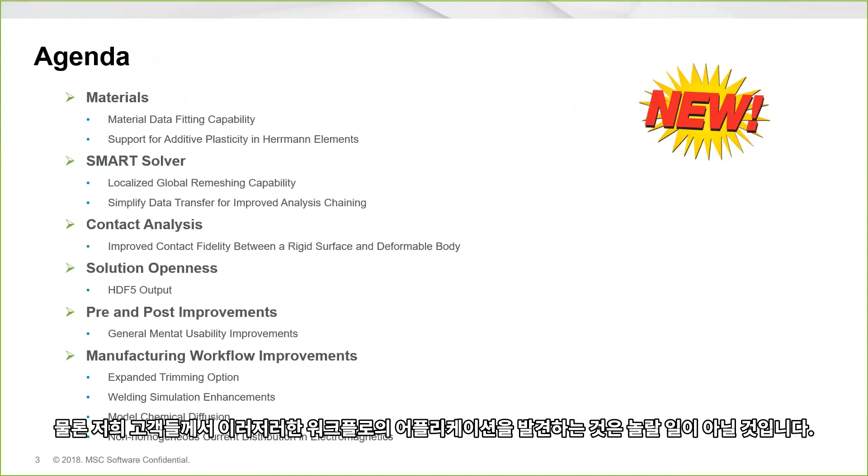So I'll go ahead and start with materials. Sorry if I rushed it a little bit. I just want to make sure we don't run out of time.

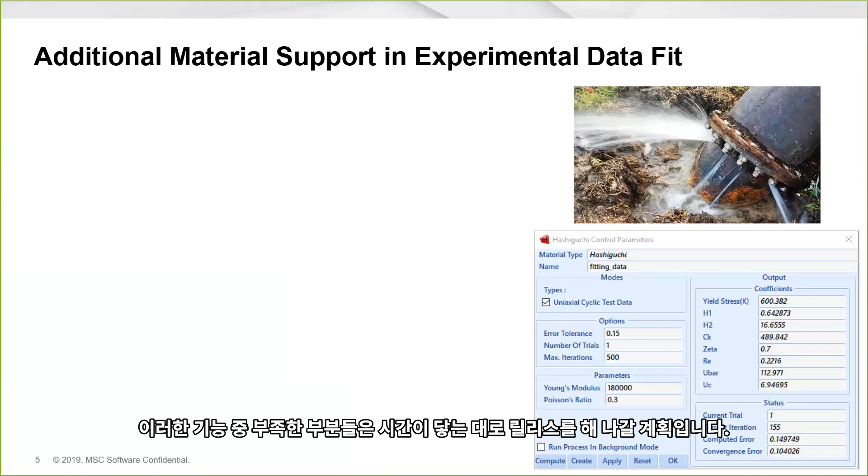We've been working on experimental data fit in multiple releases. I think this is a trend you'll see more and more, where if we aren't able to get all the functionality in one release, we continue to release as time goes on. If you're not familiar with experimental data fit, please, if you're using our more complicated models, it's definitely worth your time to take a look at it in Mentat.

So right now what we've done is we've included cyclic plasticity models now in the experimental data fit. The idea is that will make it easier to use and reduce any potential for user error on the input side.

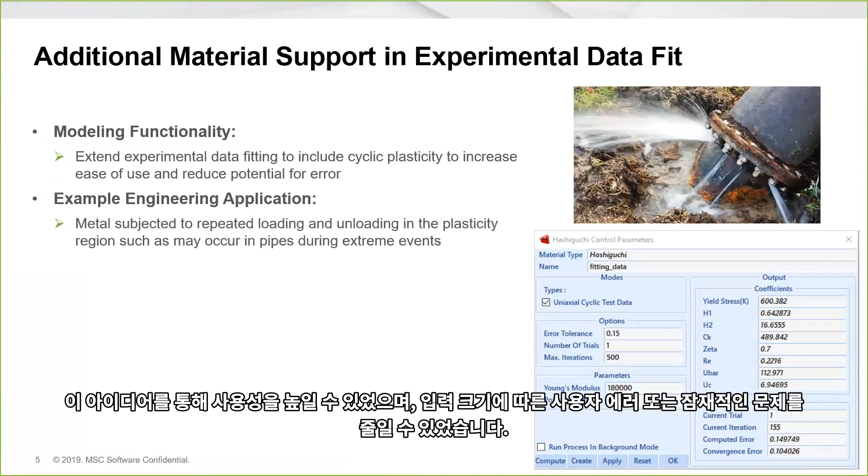Cyclic plasticity, I probably don't need to explain to most people why it's important, but we do see it a fair amount. The implementation is very straightforward. You just select the plasticity in the experimental data fit window, and now you'll have an option for cyclic plasticity. And now we support both the Chaboche and the Hashiguchi model.

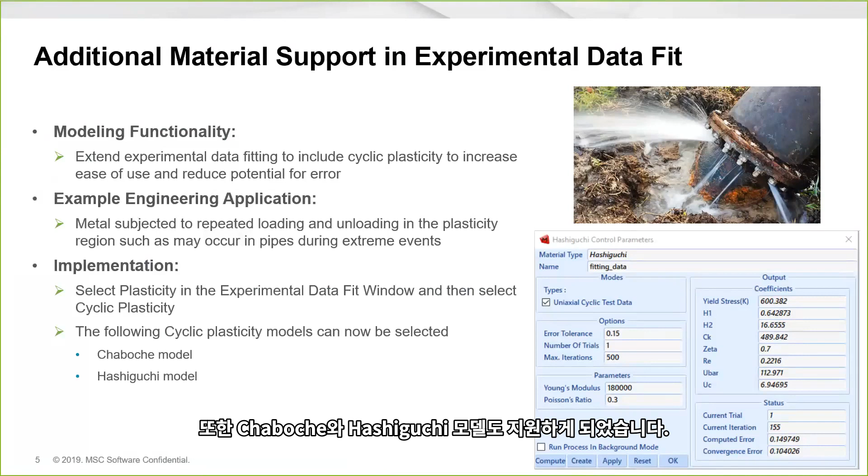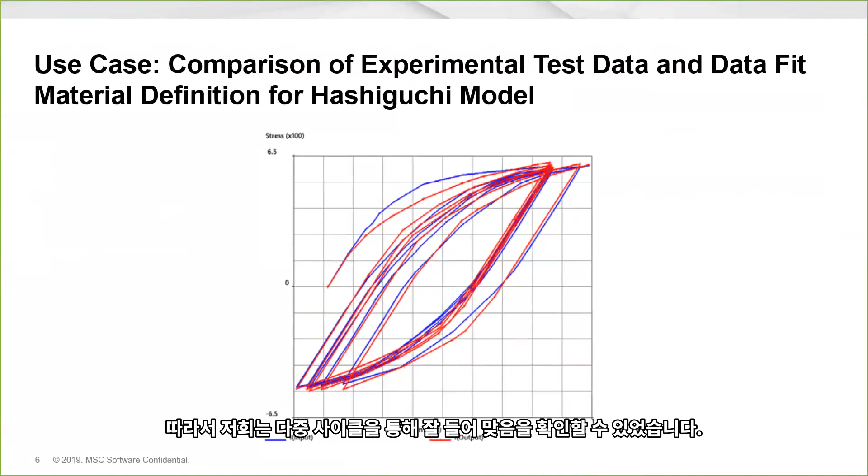The other thing we did related to materials actually bleeds a little bit into elements was really our support for additive plasticity in the Herrmann elements. If you're not familiar with them, generally for incompressible materials, they really deal with some of the shortcomings of other elements. And now we've added this additive plasticity formulation that we believe will improve the accuracy and or runtime as well over the elements you've used today.

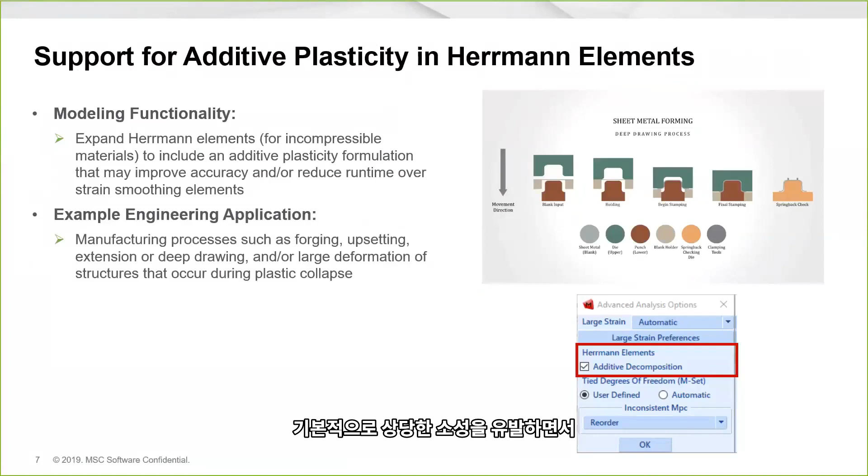So if you're doing manufacturing processes such as forging, upsetting, extension, deep drawing, anything basically where you have a large amount of plasticity, especially when it's constrained for that incompressible aspect.

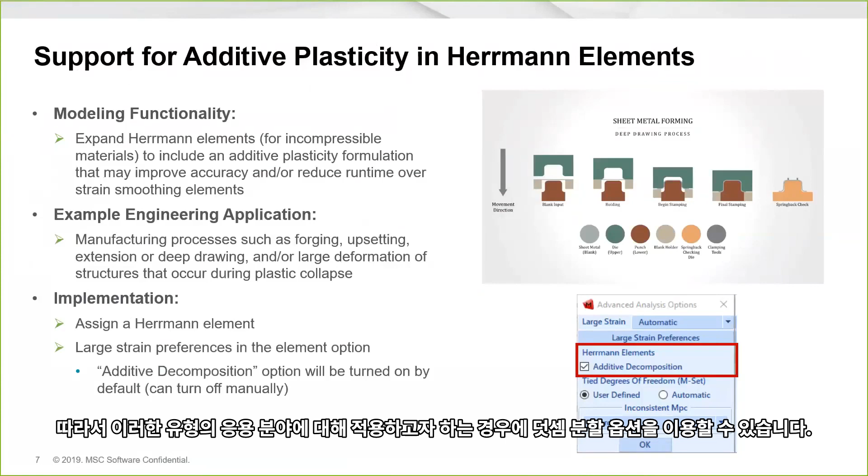So the implementation: we assign a Herrmann element, and now with that, the large strain preference in the element option, if you go to that, you'll see that it is turned on by default. So you can turn it off, but it's now on by default. This additive decomposition is really our way forward when we're talking about this type of application.

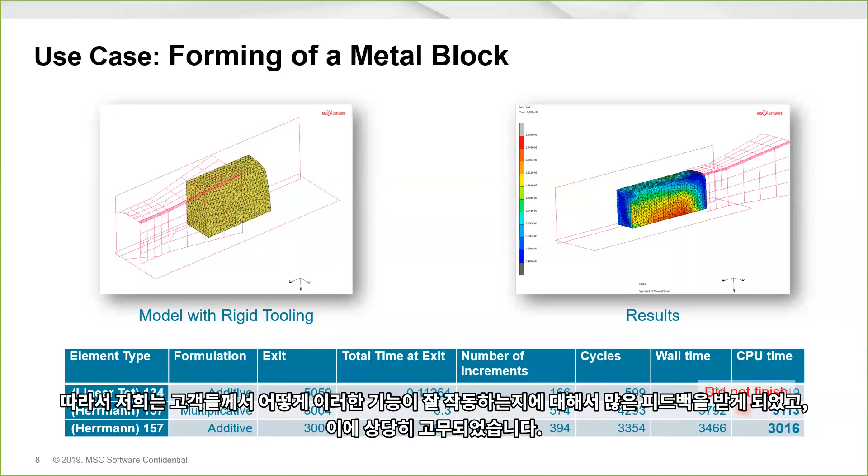Then the Smart Solver. So one example that we have in this release is this localized global remeshing capability. Right now, when you use global remeshing in previous releases, you had to remesh the entire contact body. What we've now extended as global remeshing, even though it seems a little funny because it's not necessarily global in the word of global, is that we can now run that remeshing just locally.

One area that is obviously advantageous is around crack propagation, when you really only need to remesh the area around the crack tip, but the rest of the body is not being subjected to anything significant.

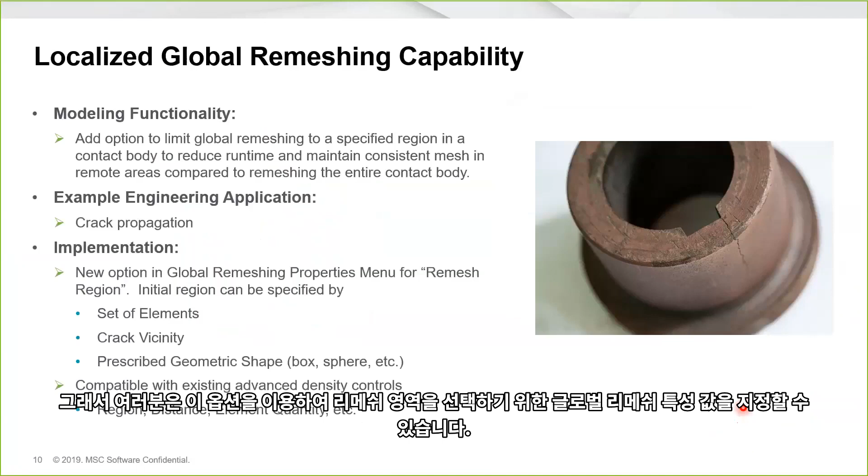So the implementation in the global remeshing property menu for the remesh region, you now have this option where you can specify this region. It can be a set of elements, as I mentioned previously, it can be about a distance around a crack tip, and then it can be a prescribed geometric shape, a box, a sphere, et cetera. And it's compatible with all the existing advanced density controls.

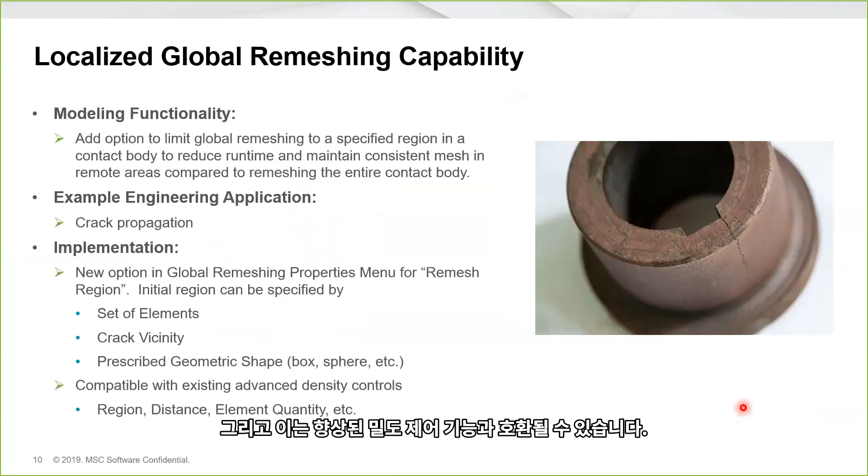The advantage of this really depends on the size of your region, the size of your overall contact body compared to what you ran before, but we do think you can get some significant runtime advantage. You can see that in the reduction in the memory and the total time it took to run this model. But it's going to vary by problem.

So again, we'd love to hear your feedback on exactly what you're seeing in your improvement using this localized global remeshing. The other advantage of this capability is that if you want to track points away from your region of interest, because it's not being remeshed, you have consistency from increment to increment on the results location and where you're pulling data from.

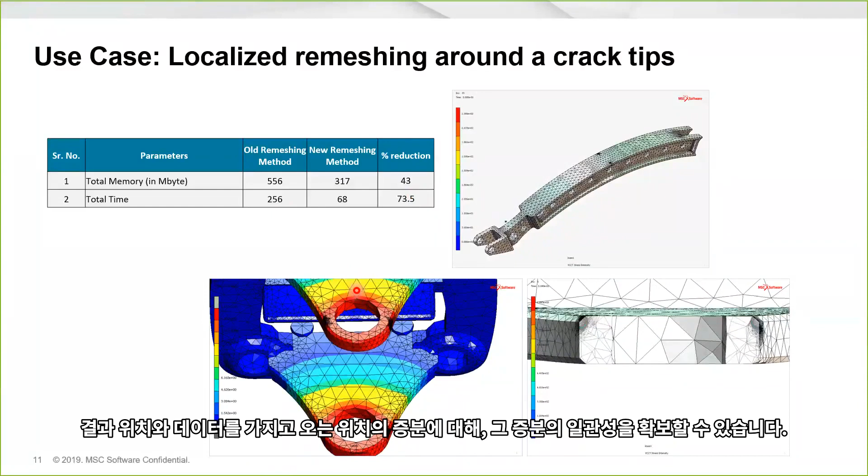The other enhancement that we're calling SMART is the simplifying data transfer for analysis chaining. Really what this is about is model section. Not everyone knew about model section before. If you're not familiar with it, I encourage you to take a look at it.

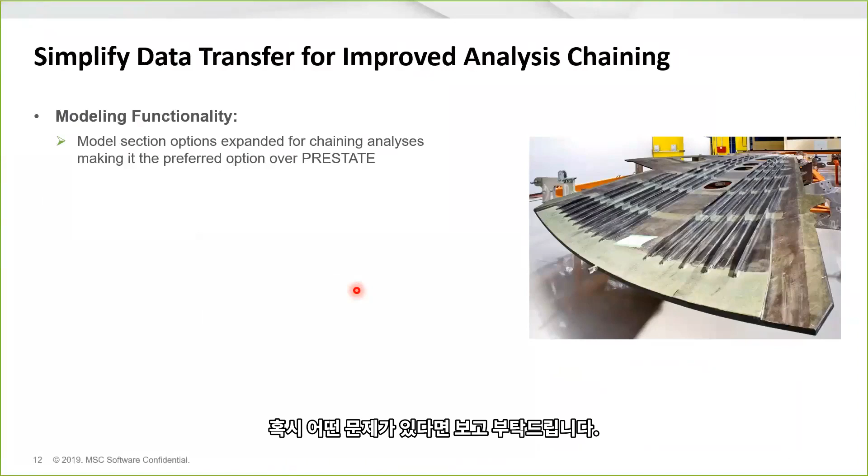We've expanded it for chaining analyses so that it's easier to do that. We think this is the preferred option over pre-state now. So if you are using pre-state, we encourage you to take a look at model section. If you see any issues, always report them to us, because this model section is definitely our path forward.

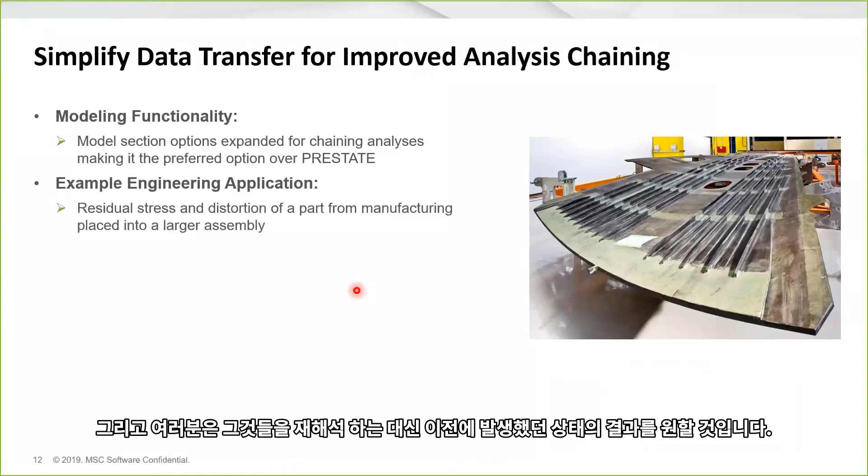So example application: maybe you have residual stress and distortion of a part from manufacturing, and then you want to place it into a larger assembly, or you're sending it to someone else to do other analyses on it, and you want that state that happened before. Instead of them rerunning it, they can use the model section to pull the actual state over into the new analyses. So the model section is defined as before, and you can do multiples.

We've added the option for the frequency of writing to include the end of the load case. It's also possible to take a lower order, a 2D or axisymmetric model, and expand it into 3D. That's already been there. What we do now is support a bias mesh when you do that expansion.

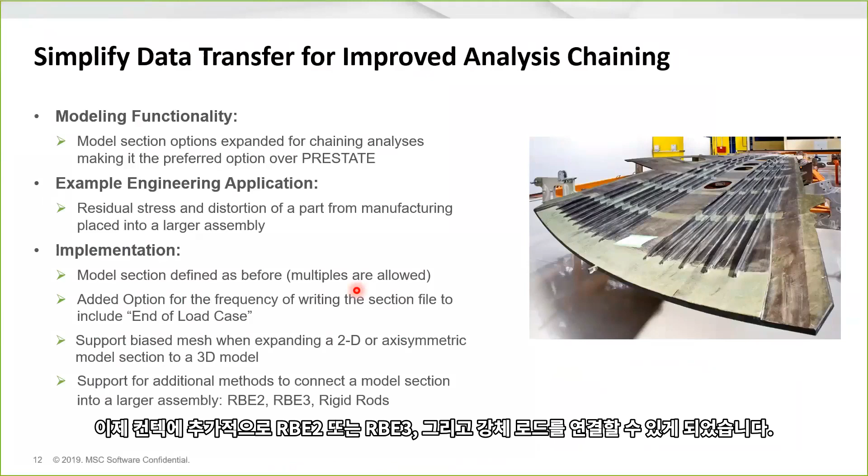And then we also support additional methods to connect the model section into the larger assembly. So now you can connect the RBE2, RBE3, and rigid rods in addition to contact, which we've had. So you can see here's an example.

So obviously chaining analysis is very important, something we think there's value in. I'll challenge us even further to start thinking about this as really a way of modularizing the analysis, because if you look here, each of these are a different model section. They could have been subjected to a different analysis.

They could have been prior to this, so maybe some kind of assembly, manufacturing, state, whatever it may be. And then you can take this and connect it together and build using RBE2s, RBE3s, rods, contacts, et cetera, and build an overall model.

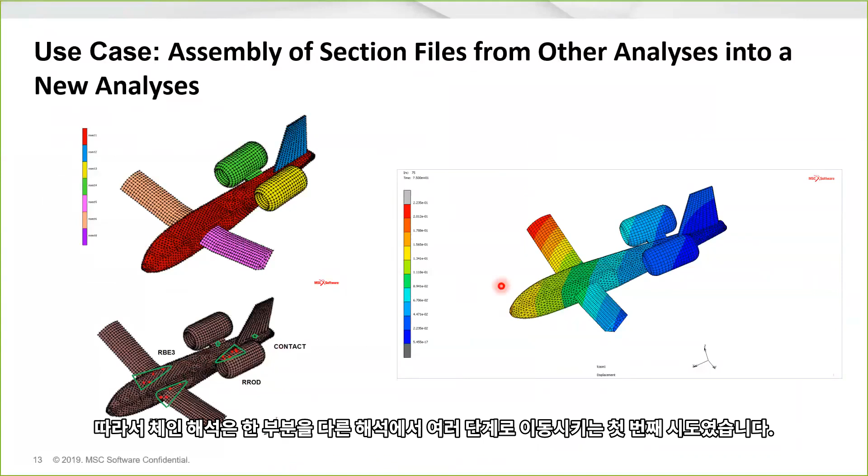So obviously analysis chaining was our initial drive to do this, of moving one part through multiple steps in different analyses. But we should also keep our eye open and look at this way of actually combining different models into a larger assembly and being able to run that larger assembly with loads as well.

I think I'm going to switch now to Bhumi, and she's going to talk a little bit about contacts.

Okay, thank you, Matt. So in contact analysis, we did enhancements to improve the contact fidelity between rigid surface and deformable body. So let's go through it. If you recall, in version 2018, we did a lot of enhancements on contact surfaces. Now with version 2019, we have done some significant enhancements in segment-to-segment contact, including rigid STL surfaces and deformable bodies. With this enhancement, our main goal is to limit the penetration to improve fidelity of the contact, which would result in improved accuracy of the contact.

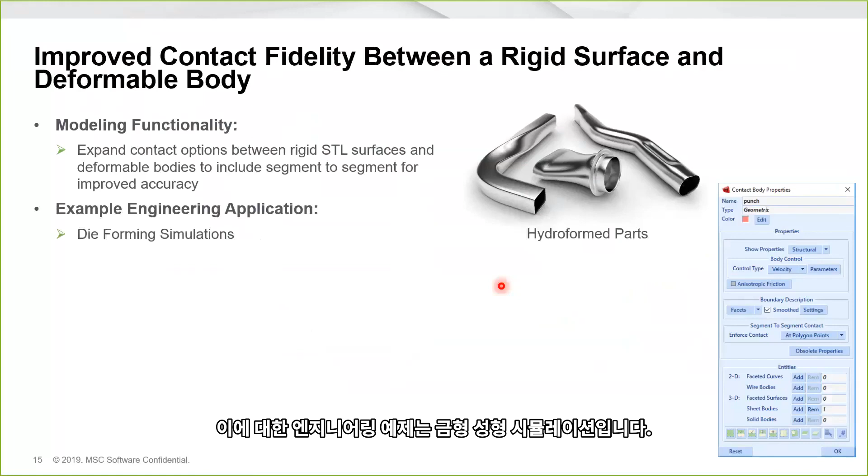An engineering example of this would be a die forming simulation. When implemented with this scenario, the STL surface can be used as is, or you can use the faceted surface option if you still choose to use that one. Additional contact points are defined by the solver on the rigid body to limit penetration. This means that there is no user input required in this case. It does it automatically.

The other area where this is useful is augmentation and associated parameters, previously limited to deformable to deformable contact, and now these are supported in geometric to deformable contact. And lastly, this new functionality supports delayed slide off between deformable and faceted surfaces.

In cases where you have a small gap in your contact surface and you don't want your contact surface to fall into that gap, which would then cause numerical difficulties and not being able to resolve itself, we now have a delayed slide off option to make it easier to go across the small gap.

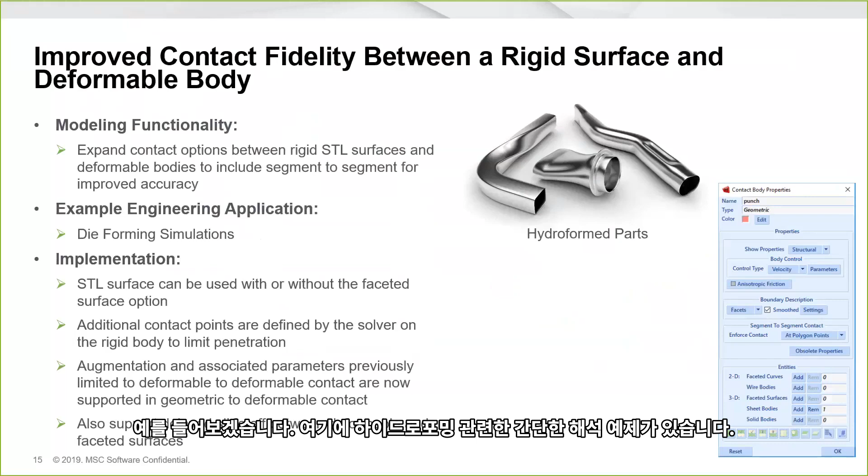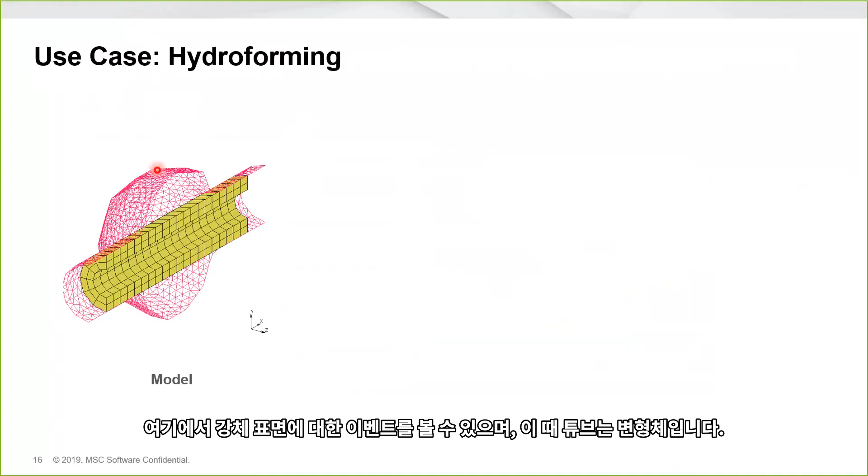So let's go through an example of this. Here is a simple case example where we have hydroforming. You can see here the red surface is the rigid body and the tube is the deformable body. And if you see the results, and if I expand them more into close-up results, you can see that we really did get a lot of fidelity there in that contact, and we did not have any penetration here.

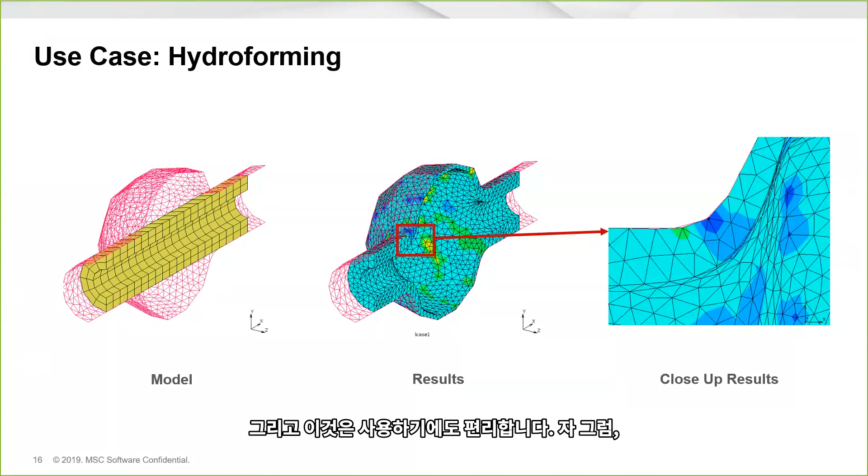This is to show that we are continuously working on contact analysis to fine-tune it and make it easy to use. And I'll also say, as I talked before about how we continue to work on our enhancements even afterwards, this is a follow-up from the previous release where we did this with rigid to rigid. So this is encouragement to the customers out there that if you see that we've done something in enhancements, we are listening in terms of making sure that we complete our enhancements and take them all the way through.

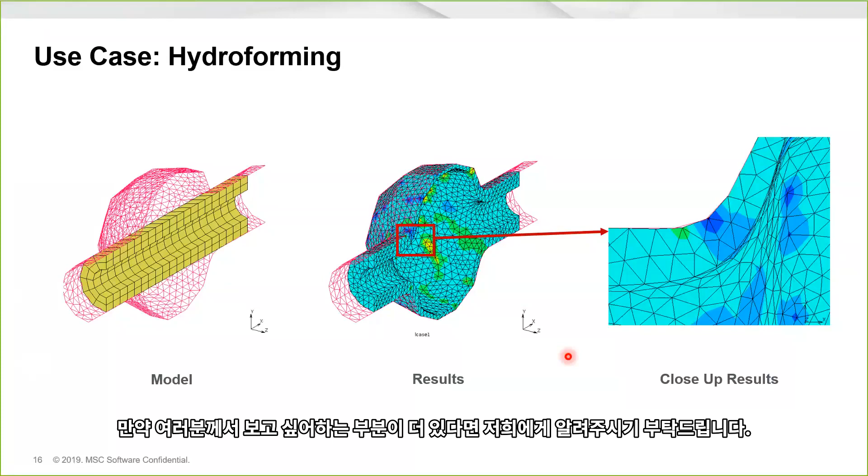Thank you. And next we will talk about solver openness.

As co-simulation is becoming more important, we realize that it is very important for us to have solver openness. So we're adding some very important enhancements to the Marc 2019 release, which is we added HDF5 output. So what is HDF5? HDF5 is basically an open source output format, which can be generated as an output result file with Marc. It could be outputted in addition to your T16 file, and the file size is really small, so it wouldn't hurt your file size at the end of the analysis.

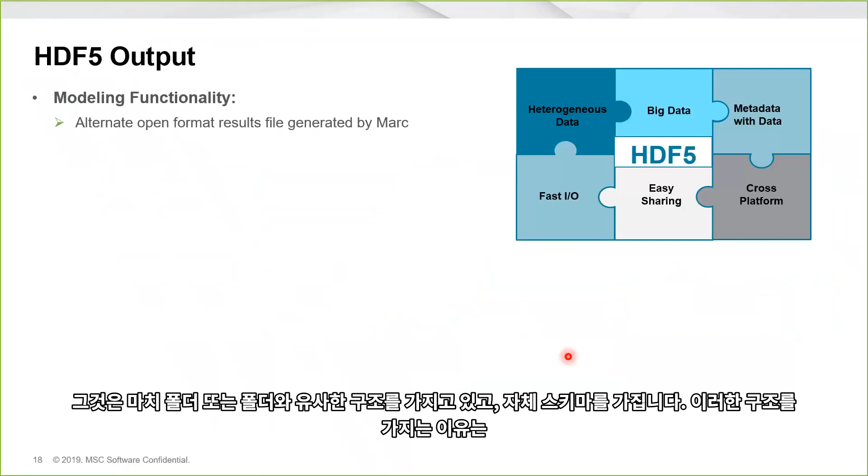HDF5 is basically an alternate open format generated by Marc 2019. It is structured, more folder-like in structure, and it has its own schema. So why did we do this? We did this in order to improve the integration into downstream engineering processes by accessing output data directly without a post-processor. As you can see over here, it looks just like an Excel sheet, and you can look at your results over there as well, along with your T16 file.

A good implementation of this would be if you use our other solver, MSC Nastran, then you can also use the HDF5 file generated from Marc. They're compatible with each other, MSC Nastran HDF5 and Marc HDF5. So if you have linear analysis with MSC Nastran and you want to move to Marc, you can do so easily, and it would be the same schema.

HDF5 is available to MSC Patran as well, so you can post-process that in MSC Patran. The outputs supported in this release are the displacements, external forces and reaction forces, and stresses and strain.

And the elements supported in this version are the basic TET elements. The linear and quadratic 2D plane stress, plane strain, axisymmetric, and the linear and quadratic 3D continuum elements are all supported.

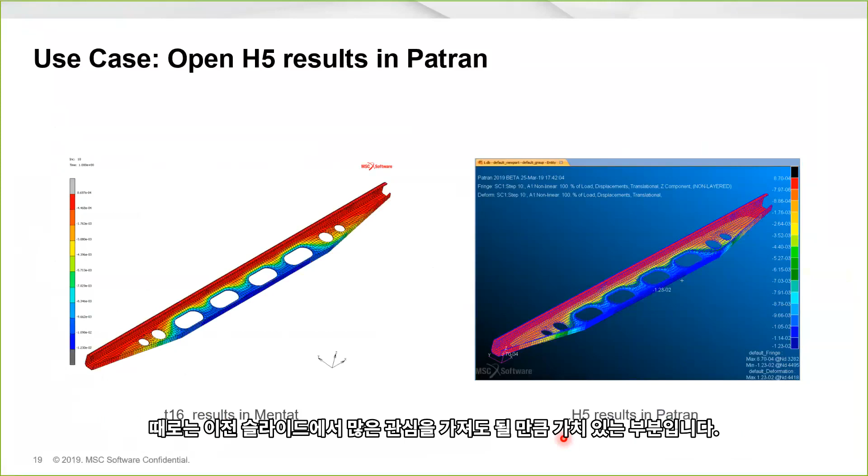Maybe if you know from the 2018 presentation, I tend to have some of my favorite enhancements, and this is one of my favorites, in terms of enhancements that can be overlooked sometimes but are really worth a lot of attention. If you go back to the previous slide, I think the important thing to remember about this output is that it is open.

In the bottom right, that's the HDF view, which is a freely available application. And you can actually look into the results and different aspects of the model that previously would have been very difficult to do, might even have required you opening it up in Mentat or Patran or a third-party post-processor.

So really, this is about making sure that you have access to the data you want and you can use that data how you want. We should also note that there are Python extensions, Java extensions, I think there's even C++ or C extensions for HDF5. There are a lot of ways of working with this HDF5 file involving scripting as well, to extract the data you want.

So in cases where maybe you already know what data you want, you can automate this and it can be extremely fast. As I said before, you may not even need to open up a post-processor. So it's a very powerful tool, a capability that, of course, is limited in this first release, but like the other things I've mentioned, we're going to continue to add to this release over release, supporting more elements, supporting more outputs. So definitely something to be interested in.

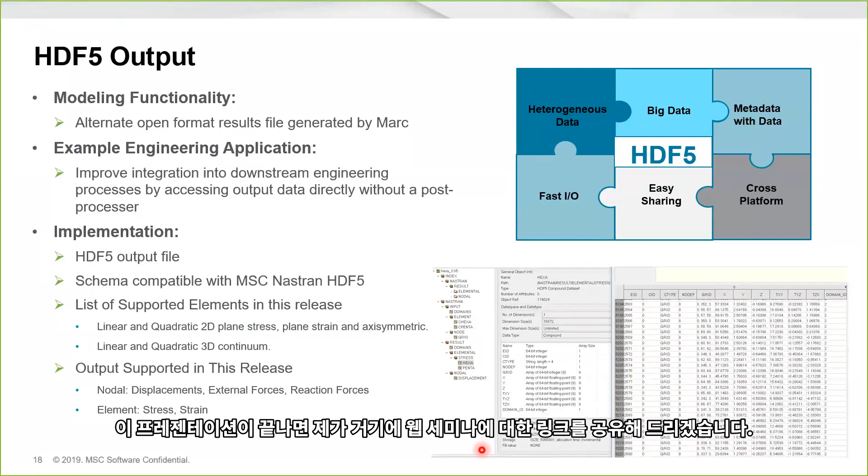And one other note: do not worry about our support for T16, we'll continue to support it. This is really about an additional format that we think adds a lot of flexibility and capability that we couldn't do with T16. Another example of that is that with HDF5, there's nothing stopping you from writing your own data to it as well, and we're considering that as we look forward on where we're going with this openness capability. We have a webinar on this on our YouTube channel, and I will share the link after this presentation.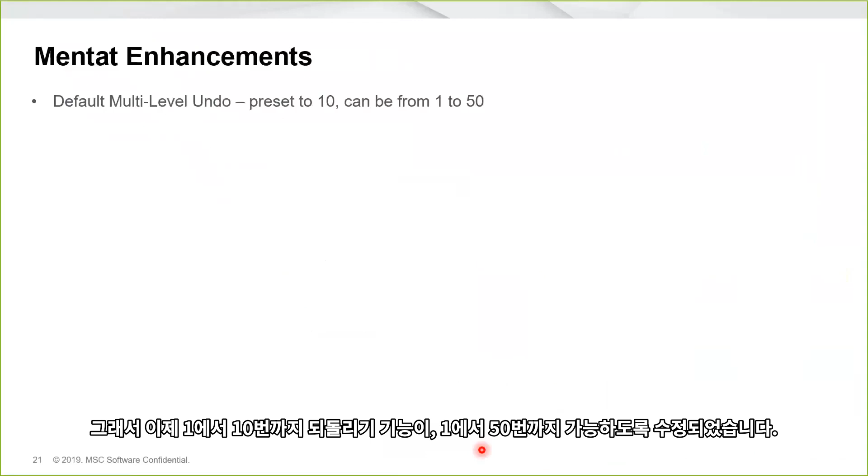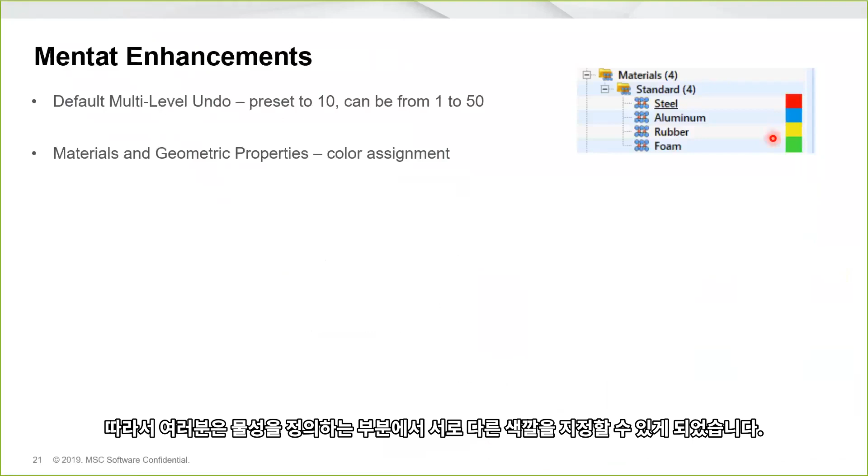Next we will talk about the pre and post improvements with Mentat. First, we changed the default multi-level undo to 10, and it can be changed from 1 to 50. Next, if you remember, we have color assignment for different contact bodies, so we extended it now to material and geometric properties, so you can define different colors for different material properties or materials. Next is the default maximum and minimum values for contour plots.

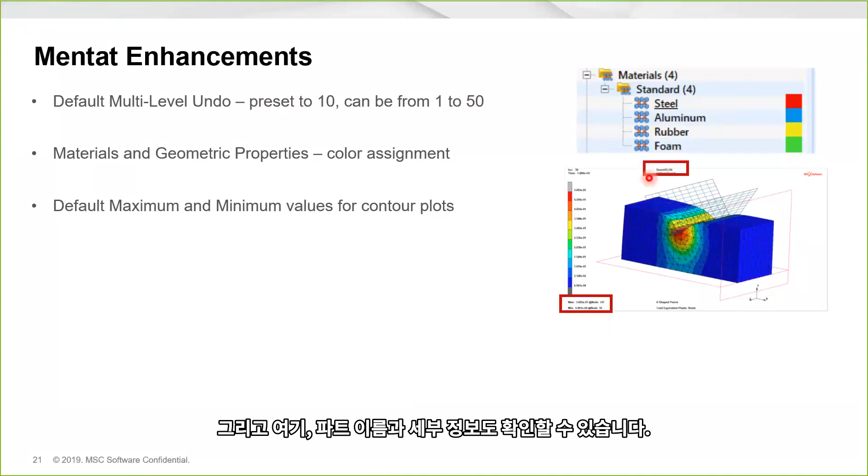As you can see in this image, we have the default maximum value and then the node number next to it, and minimum value as well, with the node or element number next to it. We also have the plot name and those sorts of details. We also added right mouse button options for show all, hide all, or show only, for curves, surfaces, elements, model sections, solids, contact bodies, and sets. Last but not least, we added an option to reduce the data points.

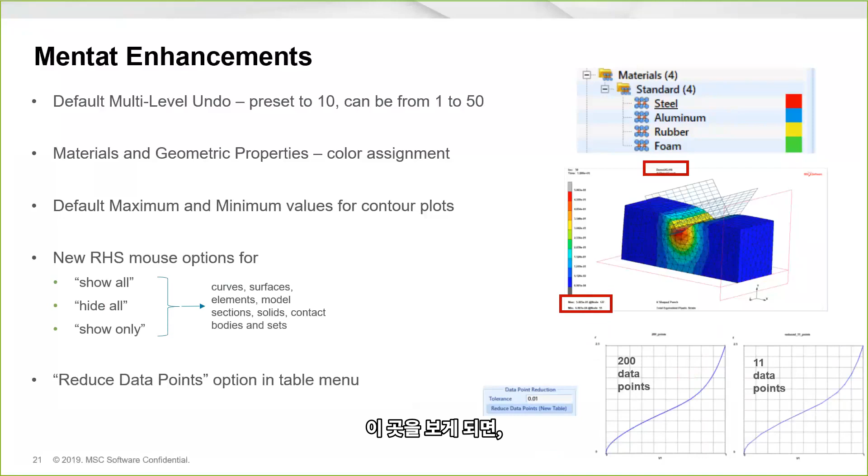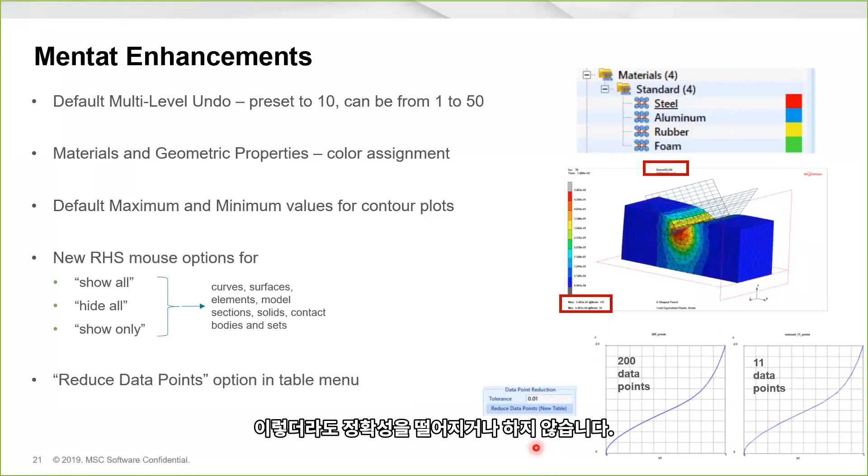In the option in the table menu, as you can see on the left and right, you have 200 data points, and you can reduce it to 11 data points without losing any accuracy in this case. So these are all the enhancements with pre-post processing.

Next, I will give control back to Matt. Okay, great. We'll talk next about some of the manufacturing workflow improvements we've done.

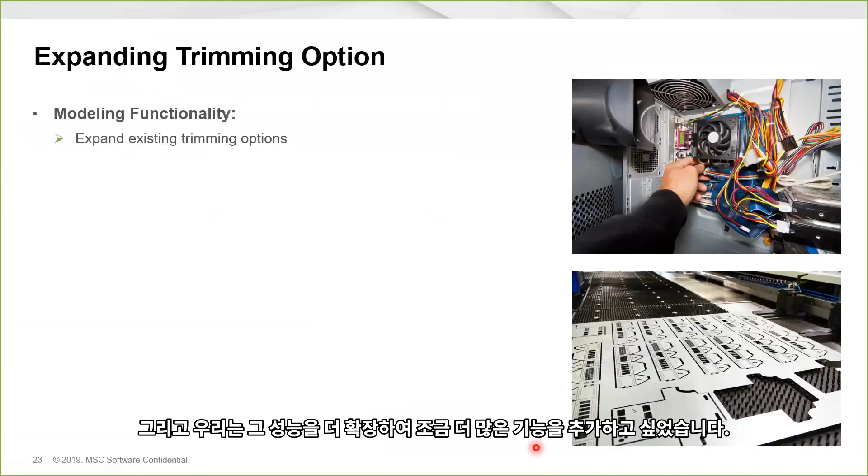We've expanded on our trimming options. We've had a trimming option, and we wanted to expand that further to add a little more capability. This is one of those functionalities where we're being aware of looking for creative ways people might use it, maybe even going beyond just replicating a manufacturing process. I won't talk about it more here, but I'd definitely be interested in other ways we could use this.

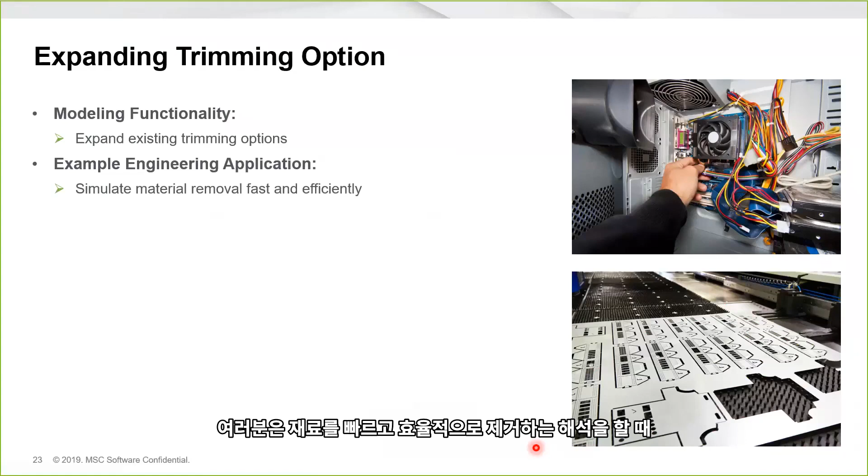You can simulate material removal fast and efficiently. Now, with the trimmer, you have the option to remove material inside or outside the trimmer, which makes it easier if it's easier to define the surface inside or outside of what you want trimmed. You can also retain the trimmed out region, maybe if you just want it separated out.

We can imprint the mesh of the trimmer onto the trimmed part if we're using a 3D mesh to do the trimming. And now we've extended the trimming tool so the trimmer can actually be defined as a faceted surface, a contact body, or a 3D mesh, in addition to a rigid body.

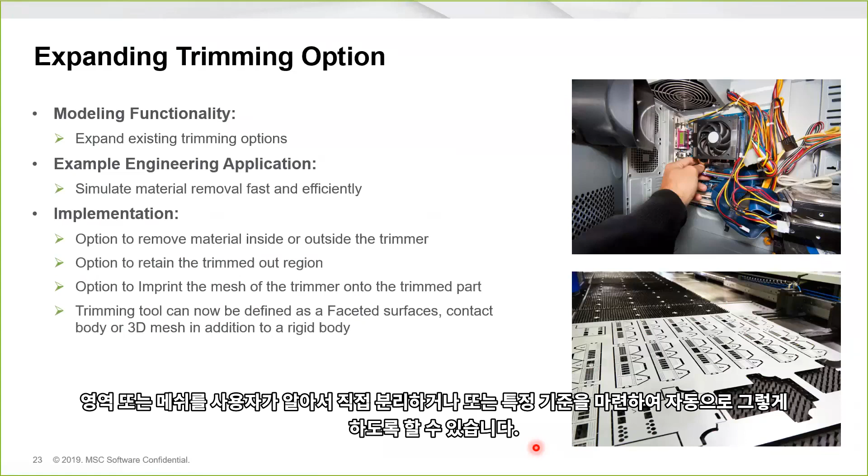If we look at these functionalities, this adds a lot of flexibility for any situation where you want to break apart a region or a mesh under more specific user control, versus having it happen due to some criteria. These are just some of the simple use cases we've done.

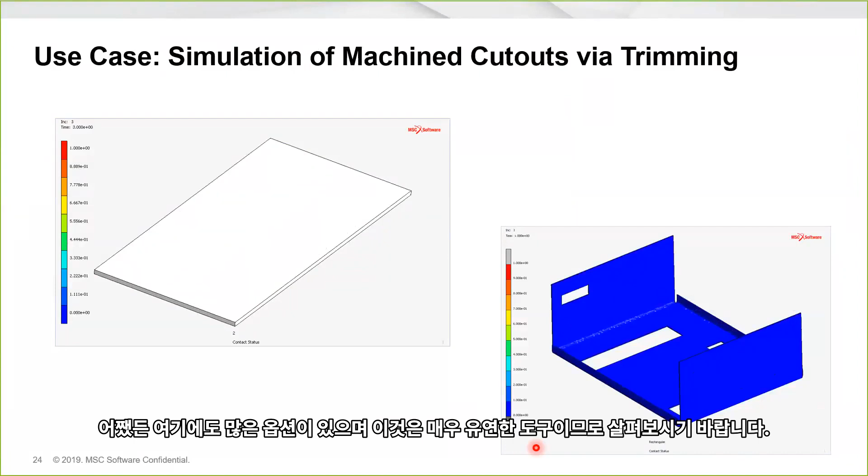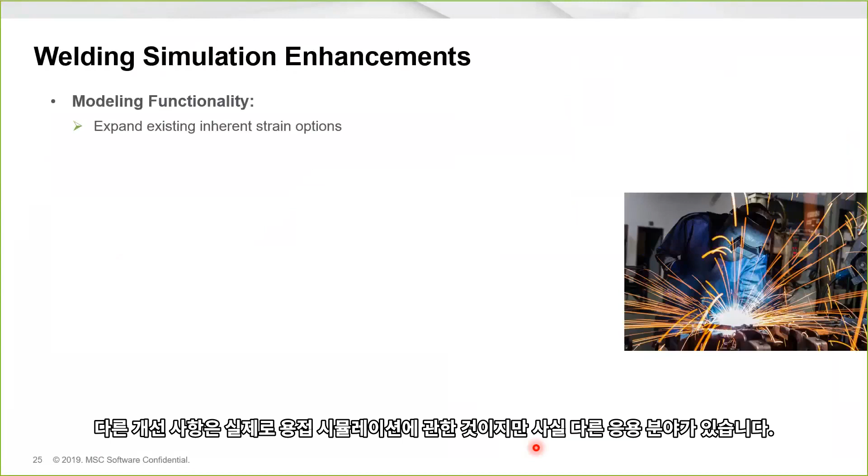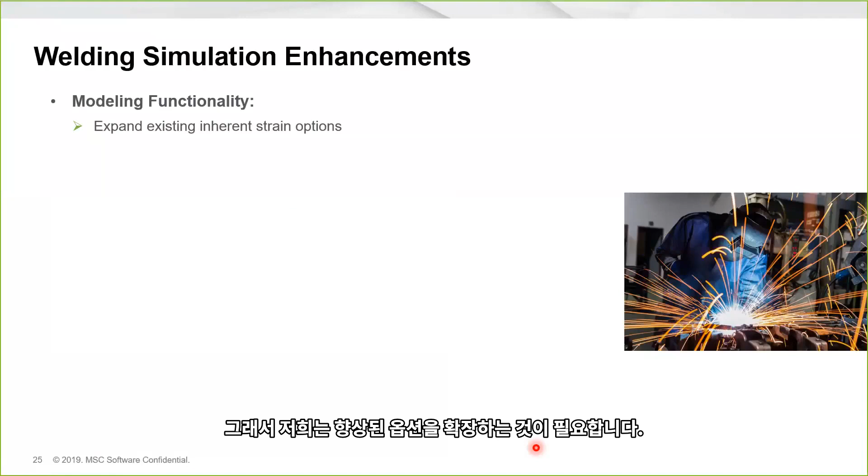The other enhancement is really on welding simulation, but this has applications elsewhere when it comes to inherent strain. We know additive manufacturing also tends to use inherent strain, so this functionality, even though we're presenting it here in the welding context, could apply elsewhere as well. So we just need to extend those inherent strain options.

If you're involved with welding, you know about the residual stress and strain associated with it. The key here is that if you have a non-flat surface, it makes this inherent strain application a lot easier.

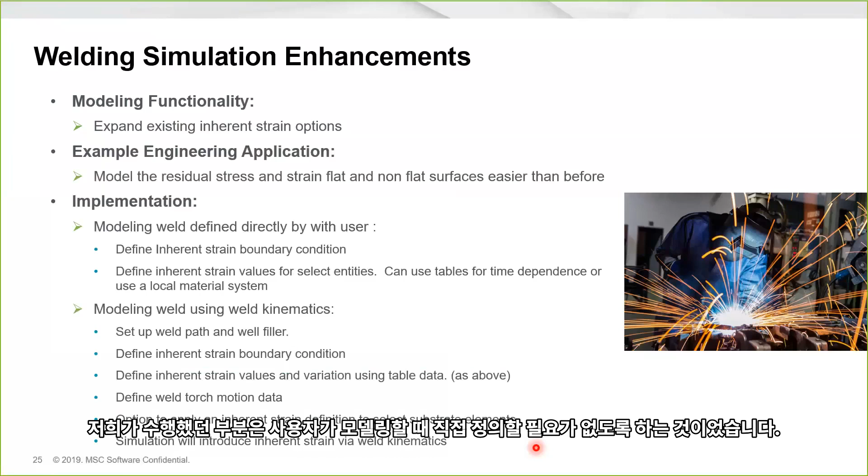The implementation we've done is that the modeling can either be defined directly by the user, or you define the inherent strain boundary conditions and then define the inherent strain values for the selected entities. You can use tables for time dependence, or, the big improvement related to non-flat surfaces, you can use a local material system.

You can also define this using weld kinematics. If that's how you're defining your welding, you set up a weld path and the weld filler as before, define the inherent strain boundary conditions, and then, as before, the inherent strain values and variation using the table data and the weld torch data. You also have other options for applying that inherent strain definition to substrate elements, and then the simulation will introduce all of the inherent strain applications.

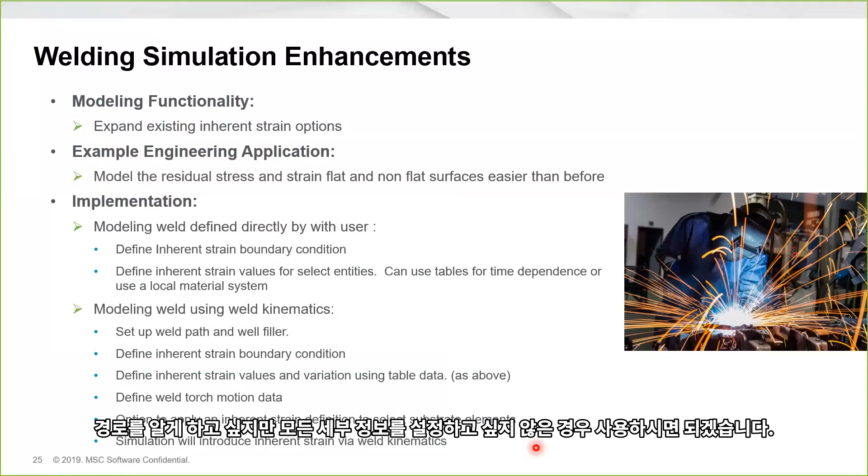So it's a more automated way of doing it, for when you know the path but don't want to set up all the details. This is a use case we have, which is the welding of a propeller shaft bearing.

I think the important parts to look at here are all the coordinate systems that if we were setting this up in a global system would be a real pain to set up. Now that we can set these coordinate systems in the local material system, we can have this whole welding operation simulated in a way that is much easier for the user, and it runs faster.

We always, of course, can use the traditional thermal structural kind of approach of doing this kind of simulation. Inherent strain is generally just much faster, what it gives up in a little bit of accuracy makes up in terms of speed.

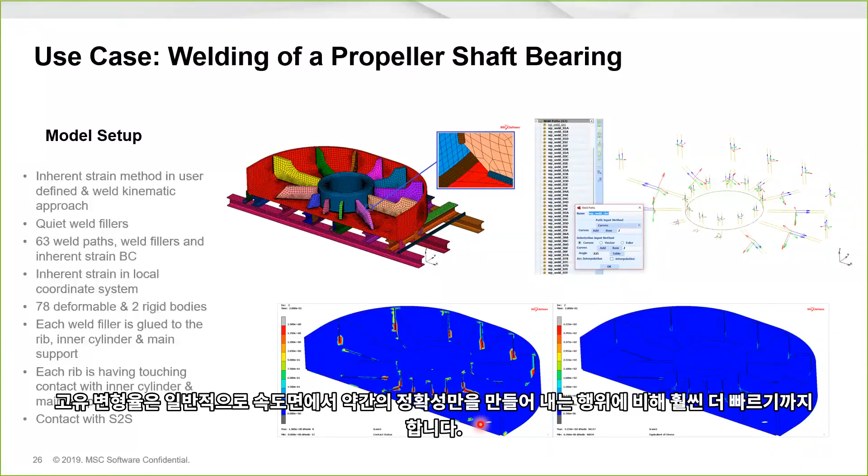Another enhancement we've done is this multiphysics path to model the chemical diffusion. So we're modeling the mass transportation due to a concentration gradient or convection. We use second Fick's law.

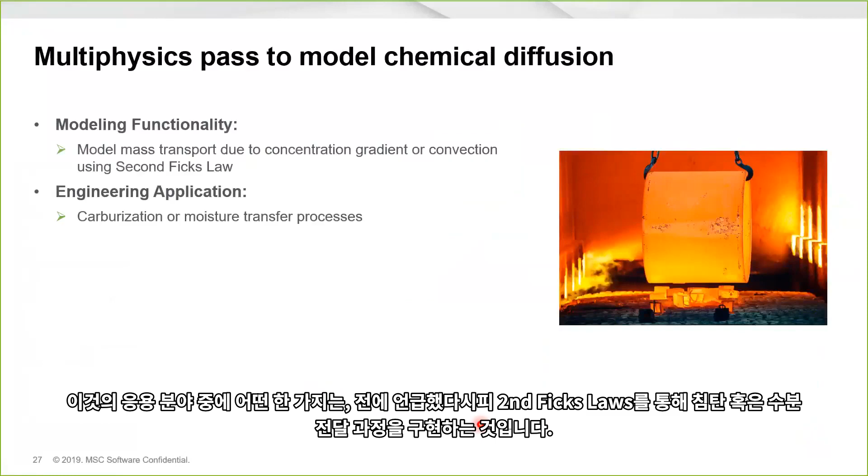Some of the applications of this might be carburization or a moisture transfer process. As I said, implementation uses second Fick's law. We now have the following coupled analysis types: thermomolecular diffusion, structural molecular diffusion, and a thermal structural molecular diffusion process.

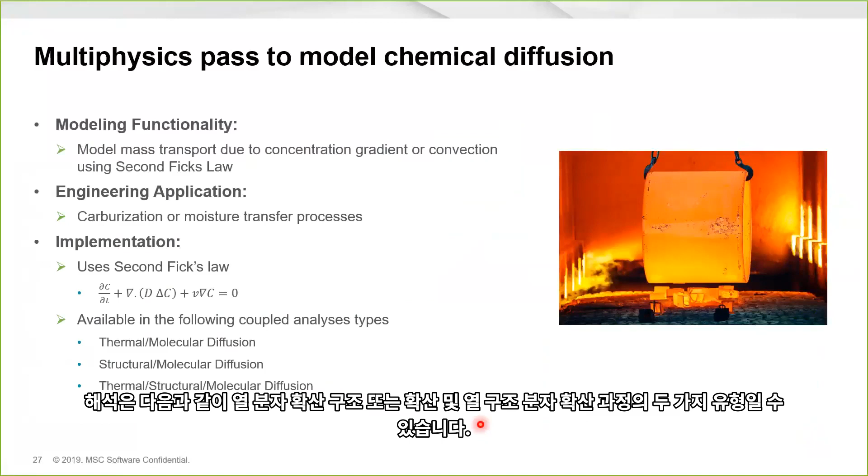The use case here is we're looking at really some carburization taking place. We have temperature profiles as we move from left to right. We submit temperature and then the cool down. So it's at peak temperature at 3,600 seconds, and then cools down completely at 7,200 seconds.

So this is our temperature profile, and we can now see what was our molecular concentration during that. And of course, it doesn't stop at the peak because there's still some diffusion out taking place at 7,200 seconds.

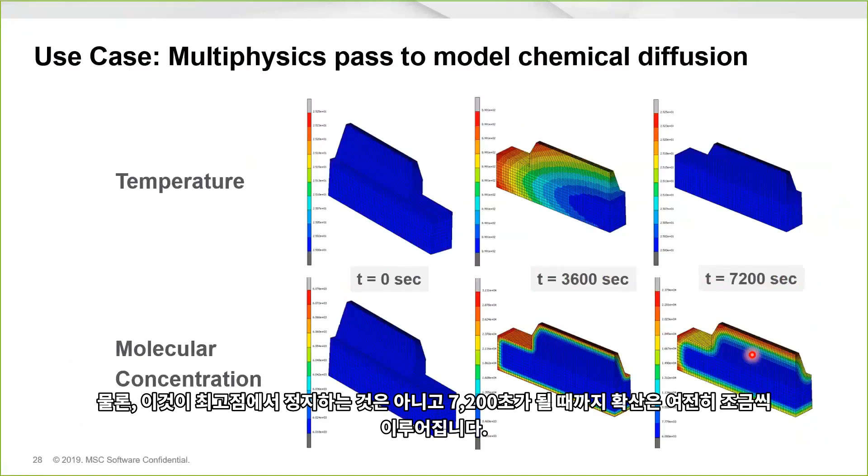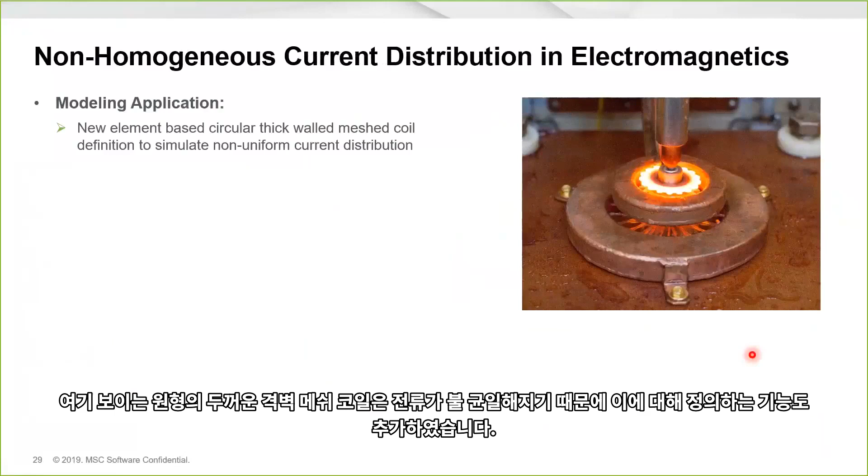And then if you've been looking closely, we have been doing a lot when it comes to this non-homogeneous current distribution, electromagnetics, a lot of stuff with induction heating. So we've now added the ability to look at circular thick-walled mesh coil definitions because the current becomes non-uniform. So, of course, induction heating with thick coils is the primary application for this.

We now have a thick-walled coiled mesh option that's added to the existing menu. We use the source current density as a boundary condition, and then what we do is an iterative process where the solver calculates the total current distributed in the coil. It's compared with the requested current, and then it's scaled to make sure that we are at the distribution that's expected along with the total requested current.

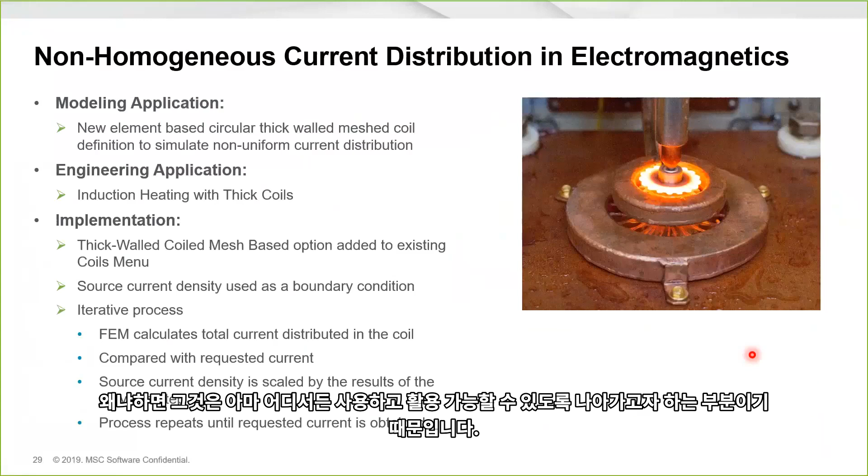So this iterative process is something that we use here, we use elsewhere, and we want to continue to use. I want to say that I'm very interested in what similar things this iterative process can bring to us in terms of the solver, because it's something that maybe we can use elsewhere, leverage elsewhere as we're moving forward.

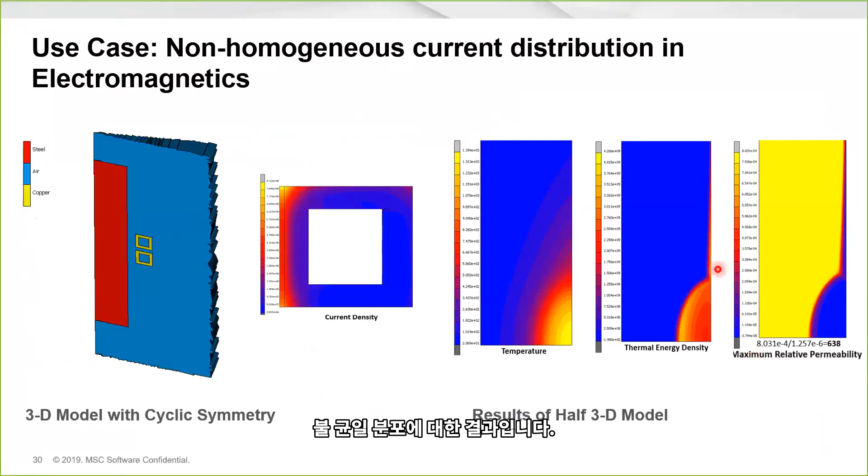And so here's the use case. We have some cyclic shown with the 3D model and some thick-walled induction heating elements. We can see the current density at the end in the thick-walled induction heating element, and then what happened in the actual model as a result of that non-uniform distribution.

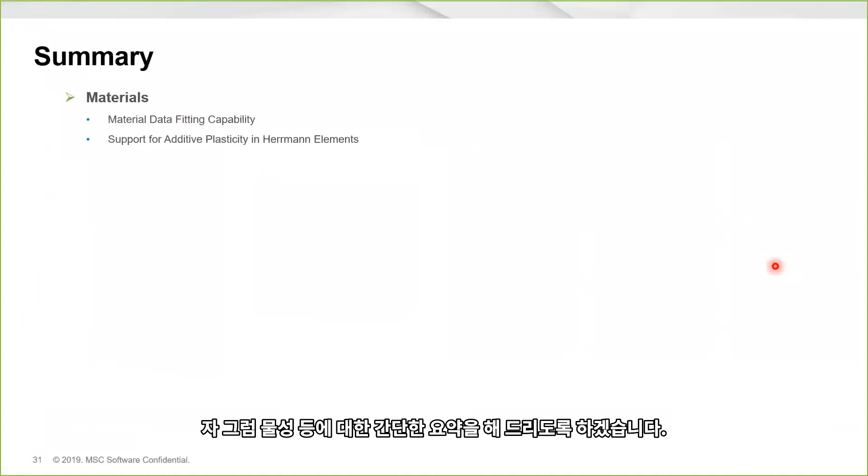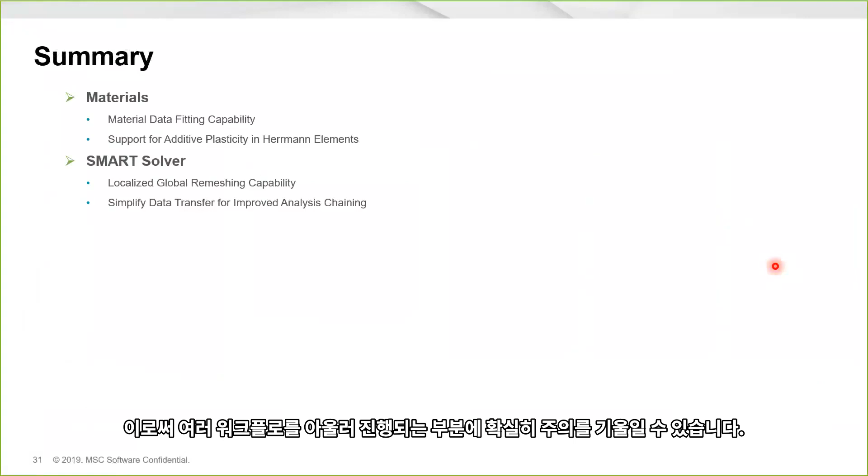So in summary, we talked a little bit about some of the material stuff we've done. The Smart Solver, which again is a category that normally we might put these things under different categories, but here I'm trying to bring them together to make sure that we're paying attention to what we're doing across multiple workflows. Contact as well, and we always continue to improve Contact.

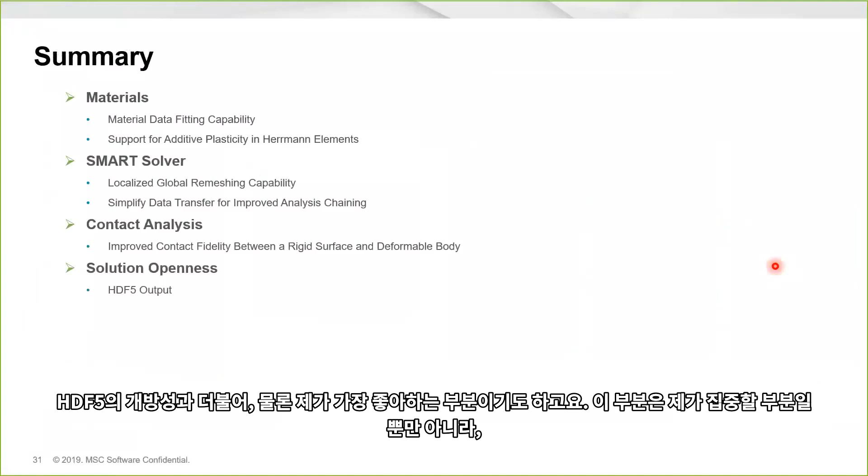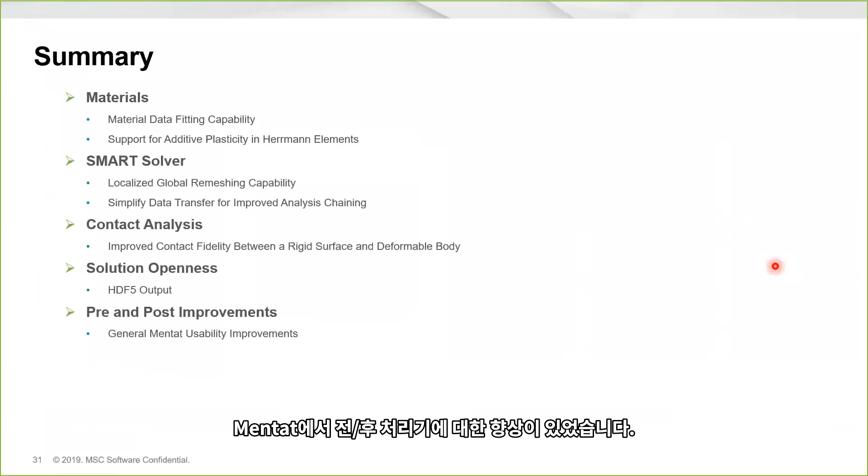This solution openness with HDF5, which is, of course, my favorite functionality—not favorite is the only one I pay attention to, but it's the one that I think you should pay attention to if this is the first time you're seeing it. Pre and post improvements that we're doing with Mentat, and then the manufacturing workflow improvements that we're doing, and we'd be very interested in feedback on any of these.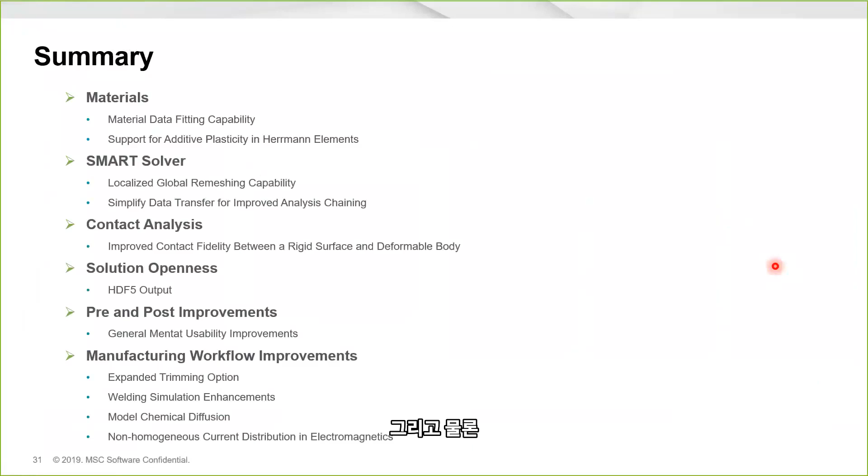Again, as I said, some of these are either finishing up or in the middle of the process of us getting to the final state of a full function capability, or in some cases, they're at the beginning. But they all yield value in their ways, so I encourage you to take a look at them, and of course always provide us feedback, because that's what encourages us to move forward with some of these.